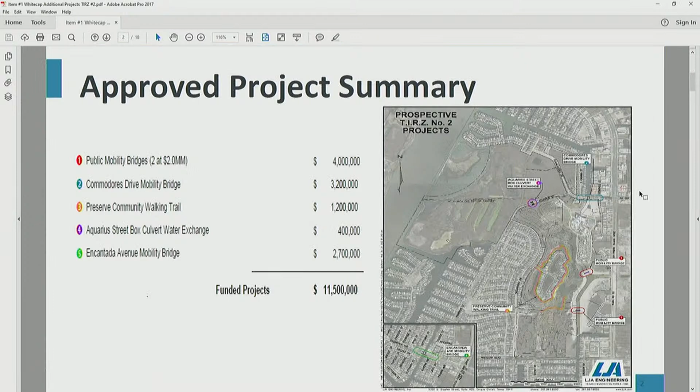This is some additional projects that Ashlar Development, who is developing the Whitecap development on North Padre Island, has come forward with. So just to recap, earlier this year the board had approved several projects totaling $11.5 million, including two public mobility bridges: the Commodore's Drive Mobility Bridge, the Preserve Walking Trails, the Aquarius Street Box Culvert Exchange, and the Encantada Avenue Mobility Bridge. These projects totaled $11.5 million, and this funding is coming through TIRZ Number 2.

And so as they've moved through the process, as we have heard through many of our projects, there has been an increase in cost for several different reasons since the additional estimate was provided to city staff and to the board. So I do have Jeff Coyne with LJA to walk through the challenges they've seen on this Commodore Bridge project and the justification for the additional money needed.

Morning, Chairman, TIRZ 2 board members, and city staff. Jeff Coyne with LJA Engineering. As Heather mentioned, the Commodore's Bridge project that we recently bid out came in over budget. Just a quick recap on that project: the Commodore's Bridge is meant to create mobility and water circulation from the south side of the island to the north side, creating much-needed water quality improvement and public boat mobility throughout.

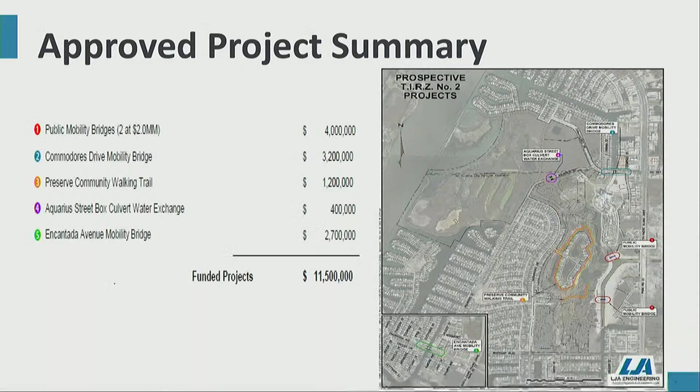Are we ready to take action on this, or? We could either give direction now, or have discussion at the very end of the presentation to consider not only the bridge, but also the additional projects, whatever the board prefers. Chairman, let's clarify. We just had a discussion about a $6 million overage, and now we're going into additional projects. Exactly. So is there action on both? No, just one action item.

Okay, so I do have a question regarding... let's see, can we go back? One more, right here. So, extra bridge structure with cost.

That is due to, he mentioned the traffic study. And that was the traffic study that was required, correct? I recall, yes. And because of that, would that be in time? Because if I recall, the traffic study was going to call for additional measures as the development progressed, is that right? Is this one of them that must be placed now? Yes, that was not anticipated clearly.

That's correct. What the traffic study told us was that the left turn movement into the future hotel site was going to require more stacking, traffic stacking in there. So that extended that left turn lane back into the bridge structure. And that was unknown at the time we did the schematic, because it was based on the traffic study, right, which I understand.

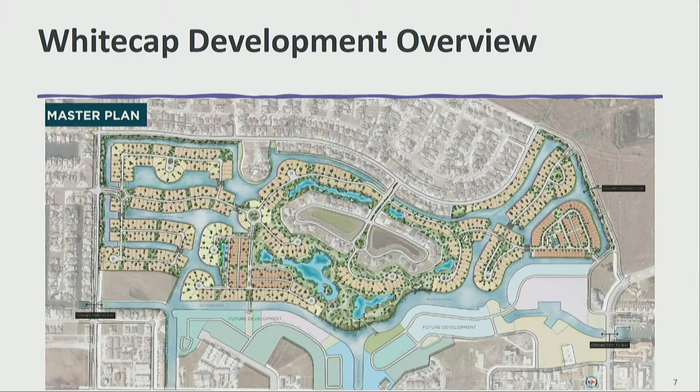So just a reminder, this is the overview of the development. It's within Commodore Street and Aquarius Street, and goes down to Whitecap, bordered on one side by Park Road 22.

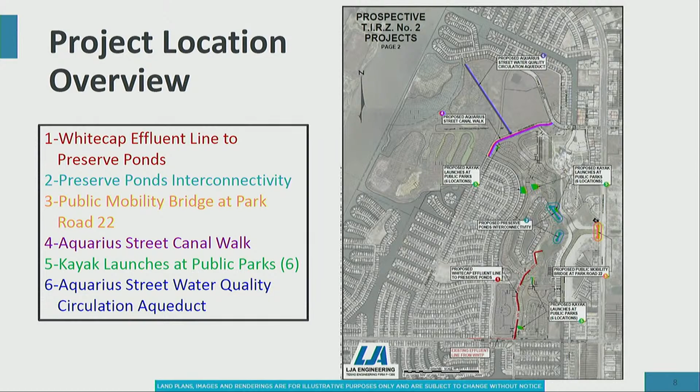So looking more at the effluent water line - this line had been in place at a different location that historically fed the golf course that used to be there. The effluent water line runs from the wastewater treatment plant, which would be to the left, off the picture. There's a main trunk of that effluent water line that runs down Whitecap Road, and it used to hook into this.

So the original effluent water line was further to the right, towards Park Road 22. When the developer came in with the master development, the water line couldn't stay where it was due to the design of the subdivision, so that piping was removed. This project will bring that piping back up into the development to feed those ponds with effluent water. I've worked with the developer and CCW, Corpus Christi Water - the water produced out of the wastewater treatment plant is suitable for use in these ponds.

So in addition to this extension from Whitecap into the development, there were two other projects we are talking with CCW and the developer about. If you remember, the TIRZ board adopted a budget that included a capital project of $1.5 million to upgrade or repair the line along with the infrastructure at the wastewater treatment plant.

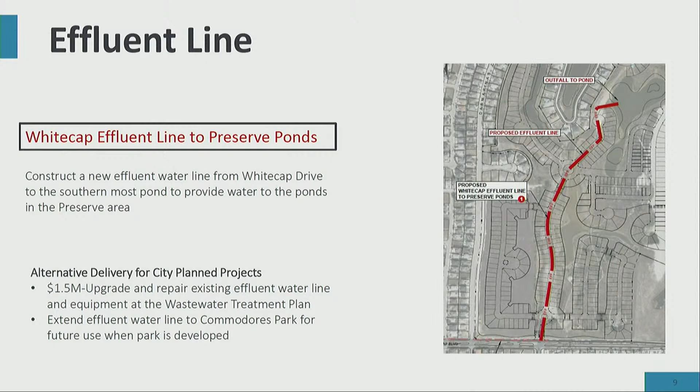So then we'll move on to the next project, which is the Preserve Ponds interconnectivity. This will allow for water movement between the ponds. As we talked about with the previous project, the effluent water line will feed into the southernmost pond. There needs to be balancing between the ponds to allow for water connectivity between them. So this would put infrastructure in between the major ponds to allow for the balancing and flow between those ponds.

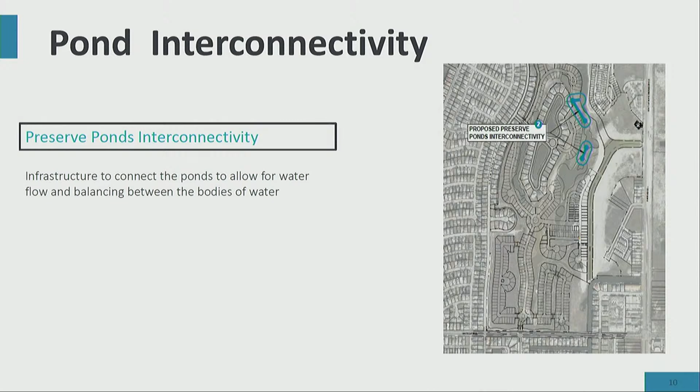So moving into the next project, this is the Park Road 22 Public Mobility Bridge. In the first round of projects approved by the board for improvements in the development were two pedestrian bridges, which connect over the canal into the preserve area. So this would be a third mobility bridge, which would connect from the north and south sides of the canal, feeding under the Water Exchange Canal under Park Road 22 Bridge.

Currently the Park Road 22 Bridge does not have any type of pedestrian access on the bridge. It is only for vehicle mobility. And so this would allow mobility from the two sides of the water exchange canal.

This would mirror what has already been approved on the other side of Park Road 22 in the Lake Padre development. They are also building a bridge to connect the two sides of the canal to allow for not only pedestrian, but also golf cart and bicycle access. The cost on this bridge is a little bit more than the other pedestrian bridges because it has to span a wider space, since this canal is wider than some of the others. This will complement the bridges not only on the Lake Padre side, but also the other two bridges that are already or will be in place on the Whitecap side.

Board Member Hernandez.

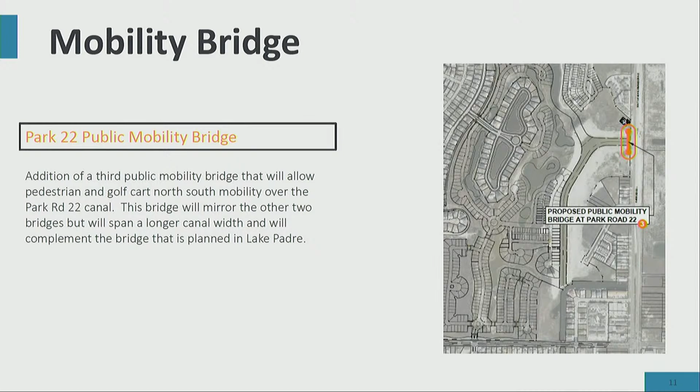Going back to this, if you look at the top right-hand side of this picture, that would be the linear park along Aquarius. As you see, there are multiple walkways and hopefully future trails from this into Commodore's Park, which would be over to the far right-hand side, that little green area in the middle. So this connects in a lot of the walkways and trailways that will be built within the development, along with the future Commodore's Park.

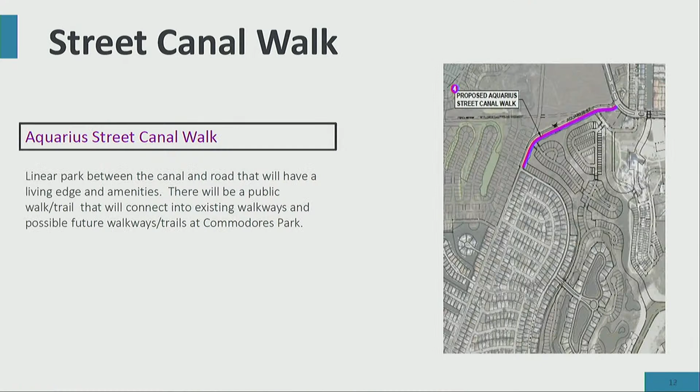So any questions on this? Okay.

Moving into public kayak launches, the developer is proposing to put kayak launches available to the public across the development. Some will be in smaller pocket parks, and some in larger green space areas. There have been questions about parking. They are still finalizing the plans for how the parks will be laid out, but it is anticipated that, especially in the larger ones, there will be several parking spaces for people to park and launch kayaks. There are a total of about 6 launches in 5 different areas across the development, open to the public, connecting into some of those pedestrian bridge areas in the preserve area.

Sure. Good luck. Thank you. Hello? Okay, there, much better.

I think I missed the last meeting, so I apologize for that, but trying to stay up to date on all this. I know the public, including the public, has been a big part and push of this, and I think really one of the selling points for all the entities to get behind this and support it. I can just picture, we get excited as a community, right? I can't imagine day 1, day 2, month 1, month 2. I mean, these are just a handful of areas. So do you feel we have adequate parking or mobility to get to these launches? Because I can see a whole slew of people wanting to use these in the early days especially, and throughout, but especially in the beginning.

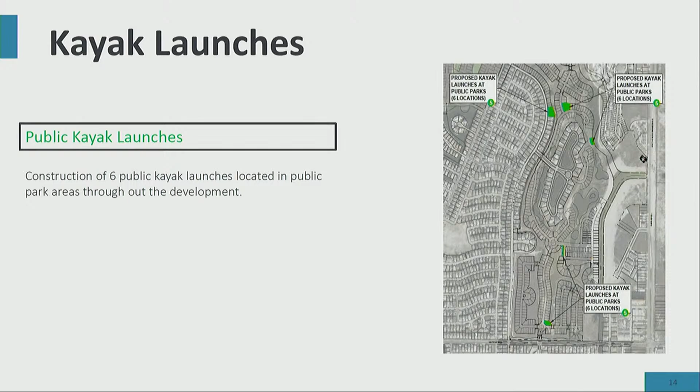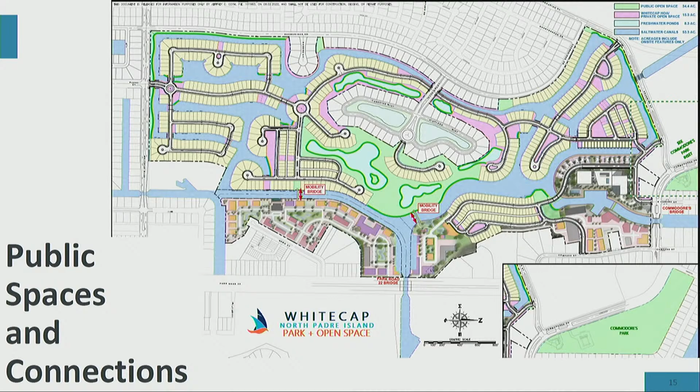Can you advance the next slide, please? There we go. Okay, so we talked a little bit about this. This is an example of how the green spaces, the walking trails, the sidewalks and roadways will connect in. This is preliminary, and they're still continuing the final planning for a lot of these areas. Next slide, please. Okay.

And then the final project is the Aquarius Street Water Quality Aqueduct. When the original plan for the Aquarius Bridge came forward, it was to put in two box culverts there to allow for water circulation into the development and into the canals, connecting all the way back out to the Gulf. This will provide that connection from basically the Laguna Madre side through here into these canals, and then will eventually go under the water exchange bridge and out to Lake Padre into Packery Channel, along with the other canals that are connected in.

This will not be a navigable canal of any type. This will be more of what we call an aqueduct, or an open ditch. Sounds not as nice, but it will be a connection for water to flow from the Laguna Madre side into this area. Then at a future date, if that land is currently undeveloped, this could be turned into more of a navigable canal in future plans that would take people through the development and out towards the other side.

Board Member Hernandez: Since this is kind of a nice ditch or something like that, is the property owner going to be maintaining this along with the canals? I believe so. Yes.

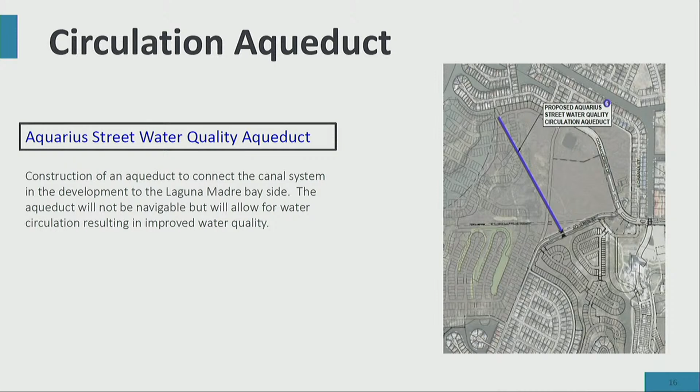Okay. So in summary, the projects that have been requested were the effluent water line, the pond interconnectivity, the mobility bridge at Park Road 22, the Aquarius Street Canal Walk, the kayak launches, and the Aquarius Street Water Quality Circulation Aqueduct. In addition, we are recommending that we partner with the developer to do the repairs for the Whitecap line that runs along Whitecap. A portion of this $1.5 million will also be used by CCW to do the repairs and renovations needed at the wastewater treatment plant to pump the effluent water line, along with moving forward looking at the extension of the effluent water line to Commodores Park. The third item is the additional request for the Commodore Bridge due to the different factors that Jeff explained to the board.

So what we would like to do is see if we can take action. I know that the board has already approved the effluent water line piece, but go through and get consensus on moving forward with negotiating the development agreement with the developer on these additional projects, along with moving forward with partnering with the developer to do the effluent water line and the additional funding for the Commodores Bridge.

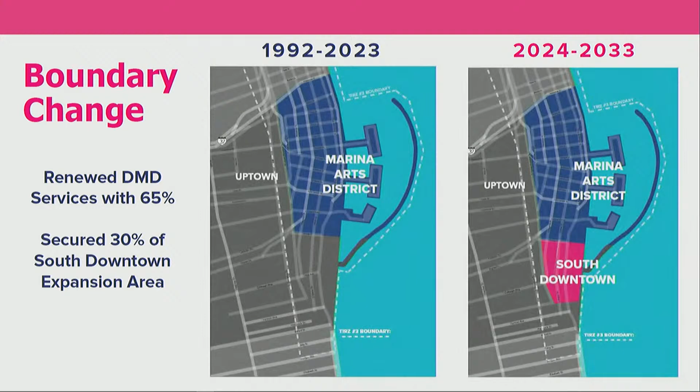So we have secured the DMD renewal, and we are in the process of doing the southern expansion. We changed the levy, as I've mentioned.

This is what we're proposing for the FY24 funding model, moving the contract from $665,000 to $875,000, plus 2 buckets for specific services that we do for the city, including right-of-way and parks improvements, and then potentially 2 one-time projects.

These are the additional improvements that we have proposed as part of the service plan. We are funding those not through the DMD interlocal agreement, but the city will maintain those dollars, and we'll work out a deal to get those invoices paid, but we will manage the projects themselves.

And then 2 additional items that we're proposing for FY24 are ADA accessibility and our expansion plan. Those are not TIRZ funded, but since we're not coming before this board too frequently, I wanted to make sure we were providing full transparency about what we're doing over the next fiscal year.

And then the other service plan updates, there's a number of slides in here. This is really just kind of a high-level review of what we've accomplished in FY23. I'd be happy to answer any questions, but it's pretty detailed and there's a lot of information in there. So with that, I conclude my presentation and stand by for questions.

Okay, thank you. Questions? Anyone? Okay, Alyssa, if you would go back to page 12 real quickly, please, on the presentation. I think it was page 12. Yes, well, yeah, right there.

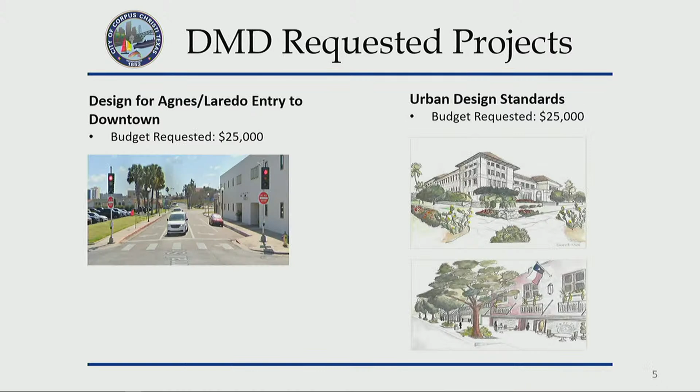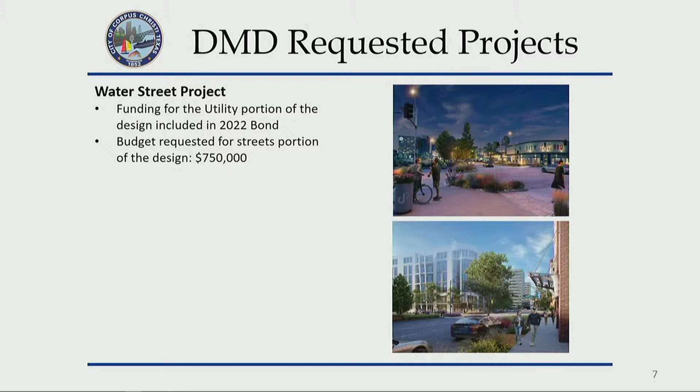A parking pilot project, which we're looking at some permeable parking surfaces, along with the two items that Alyssa did mention. Within the DMD's request, they are requesting additional funding for website design, along with office space build-out within their new office, in addition to the $210,000 for the increase in their contract with the TIRZ for those things included in their service plan.

Questions? Motion to approve. I second.

Okay, I have a motion and a second to approve item number, 7. Yeah, that's item number 7. It's different in mine, mine's misnumbered. Anyway, let me make sure I'm reading the right one, Heather.

This is the resolution authorizing an amendment to the fiscal year 23-24 Corpus Christi Tax Increment Reinvestment Zone number 3 budget, which increases expenditures by $1,944,727 for the increased spending for the Corpus Christi Downtown Management District interlocal agreement and one-time expenditures requested by the DMD outside of the interlocal agreement.